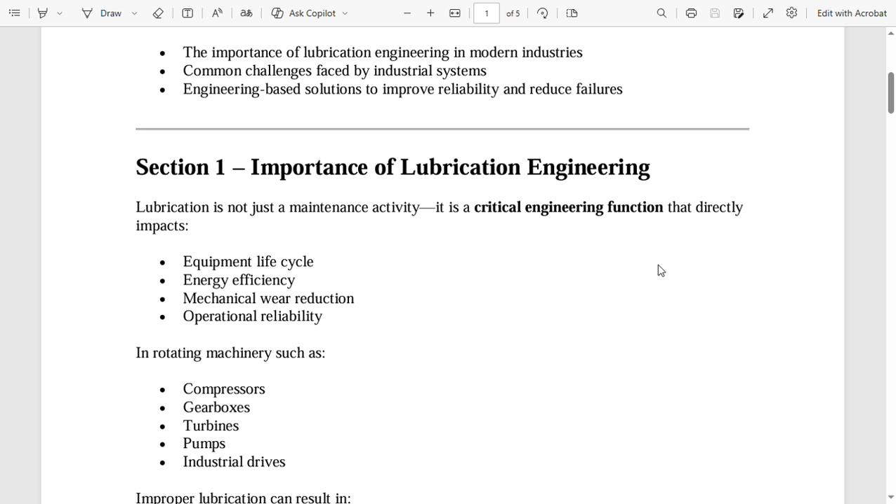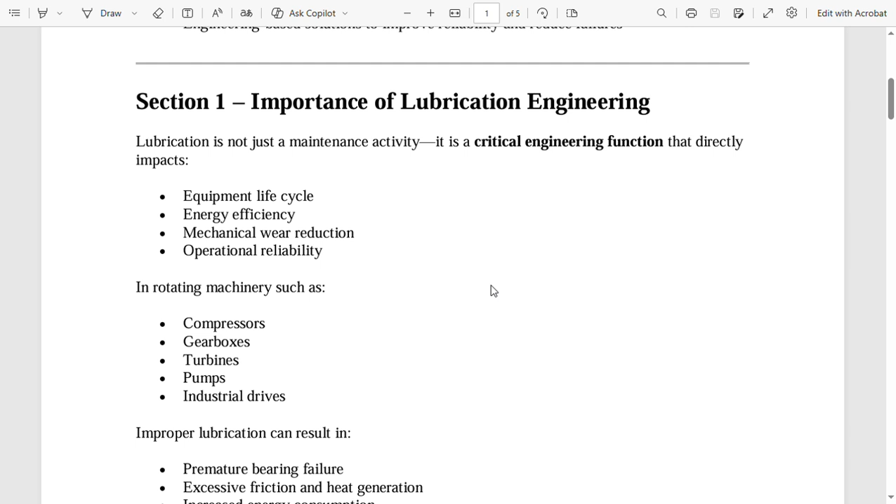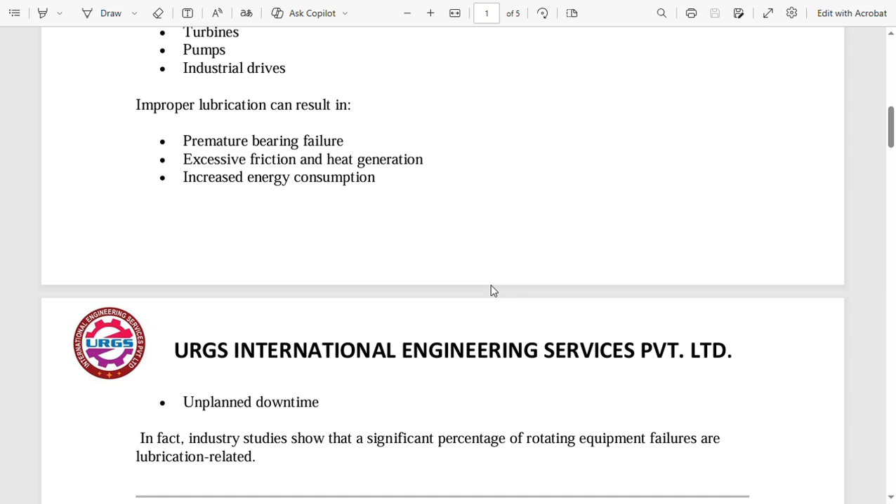Now, importance of lubrication engineering. Lubrication is not just a maintenance activity. It is a critical engineering function that directly impacts equipment lifecycle, energy efficiency, mechanical wear reduction, operational reliability. In rotating machinery such as compressors, gearboxes, turbines, pumps, industrial drives, improper lubrication can result in premature bearing failure, excessive friction and heat generation, increased energy consumption, unplanned downtime. In fact, industry studies show that a significant percentage of rotating equipment failures are lubrication-related.

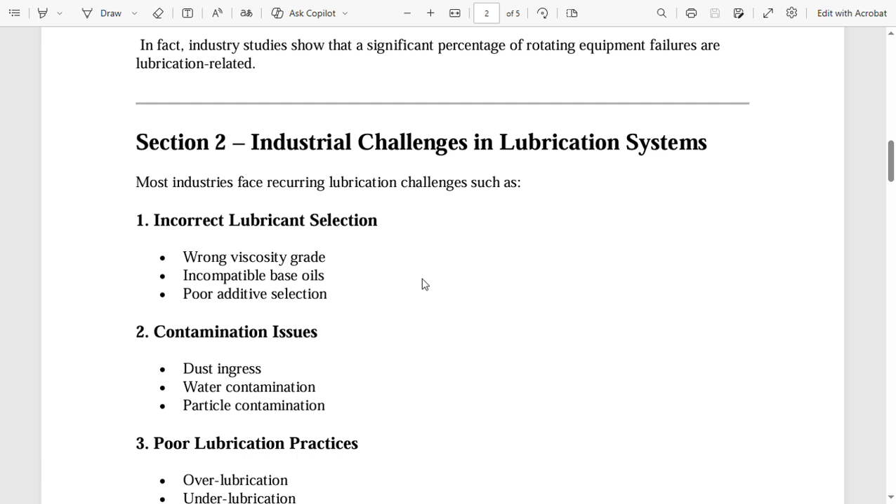Then next is industrial challenges in lubrication systems. Let us see this. Most industries face recurring lubrication challenges such as incorrect lubricant selection, wrong viscosity grade, incompatible base oils, poor additive selection, then contamination issues like dust ingress, water contamination, particle contamination.

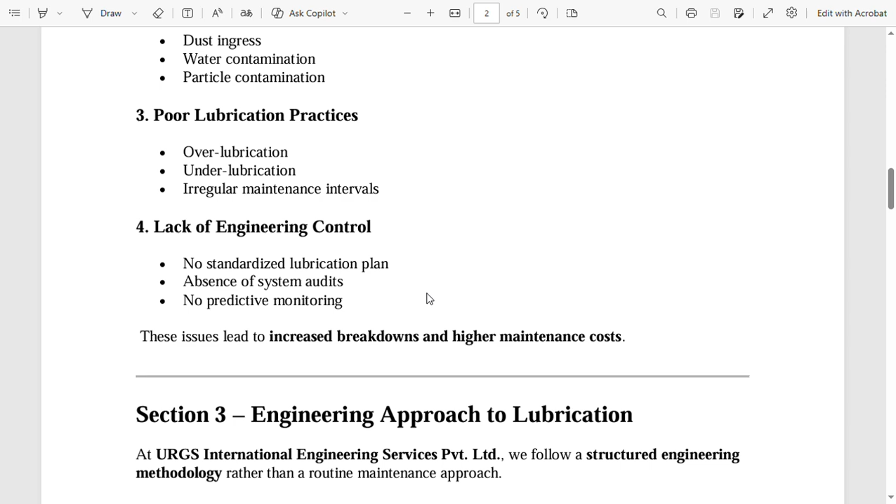Then next is poor lubrication practices: over lubrication, under lubrication, irregular maintenance intervals. Then lack of engineering controls: no standardized lubrication plan, absence of system audits, no predictive monitoring. These issues lead to increased breakdowns and higher maintenance costs.

Now engineering approach to lubrication. At URGS International Engineering Services Private Limited, we follow a structured engineering methodology rather than routine maintenance approach. Step 1, system assessment: equipment criticality analysis, lubrication point mapping, failure history review. Step 2, lubricant engineering study: viscosity optimization, compatibility analysis, OEM versus actual operating condition review.

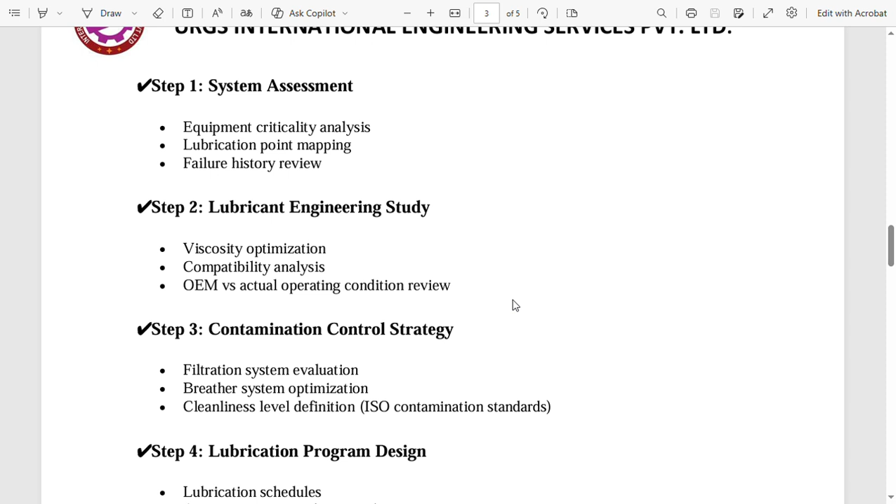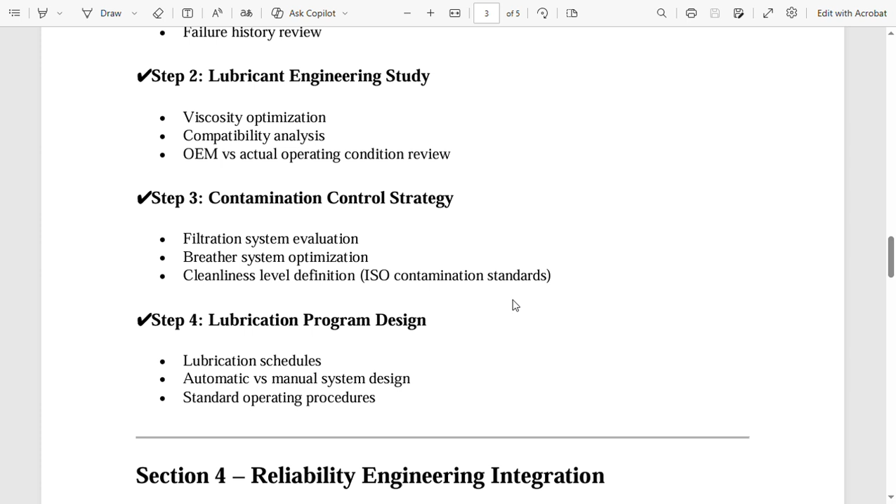Step 3, contamination control strategy: filtration system evaluation, breather system optimization, cleanliness level definition, ISO contamination standards. Step 4, lubrication program design: lubrication schedules, automatic versus manual system design, standard operating procedures.

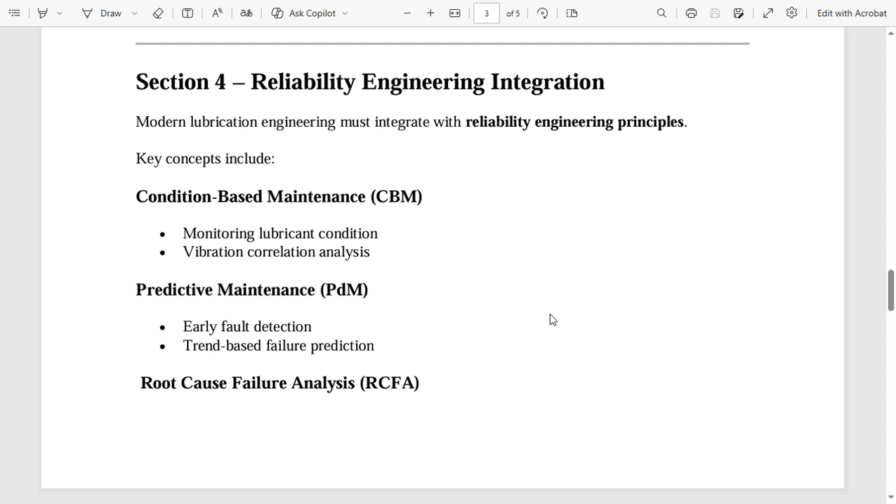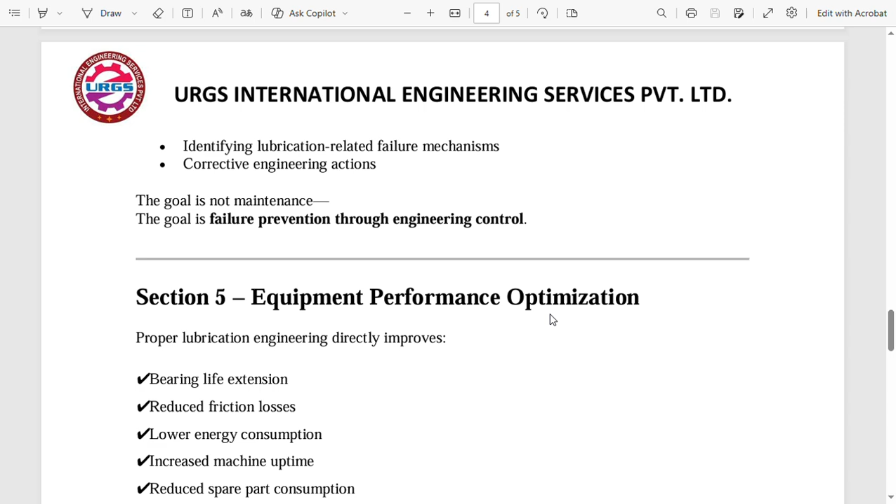Then next is reliability engineering integration. Modern lubrication engineering must integrate with reliability engineering principles. Key concepts include condition-based maintenance (CBM), monitoring lubricant condition, vibration correlation analysis, predictive maintenance (PDM), early fault detection, trend-based failure prediction, root cause failure analysis, identifying lubrication-related failure mechanisms, corrective engineering actions. The goal is not just maintenance. The goal is failure prevention through engineering control.

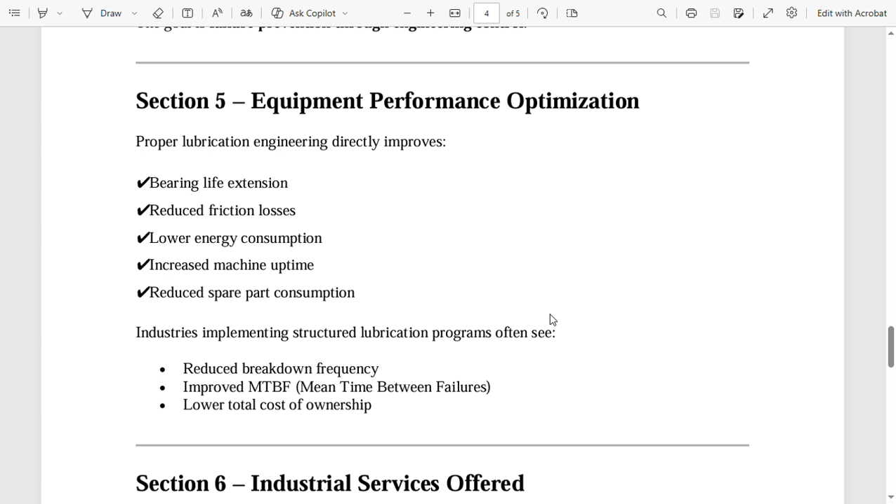Then next is equipment performance optimization. Proper lubrication engineering directly improves bearing life extension, reduced friction losses, lower energy consumption, increased machine uptime, reduced spare part consumption. Industries implementing structured lubrication programs often see reduced breakdown frequency, improved MTBF, mean time between failures, and lower total cost of ownership.

Then industrial services offered. URGS International Engineering Services Private Limited provides end-to-end technical consultancy, including lubrication system engineering design, industrial lubrication audits, failure analysis and RCA studies, reliability improvement programs, condition monitoring integration, training and technical awareness programs. Our approach is engineering driven, data-based and reliability focused.

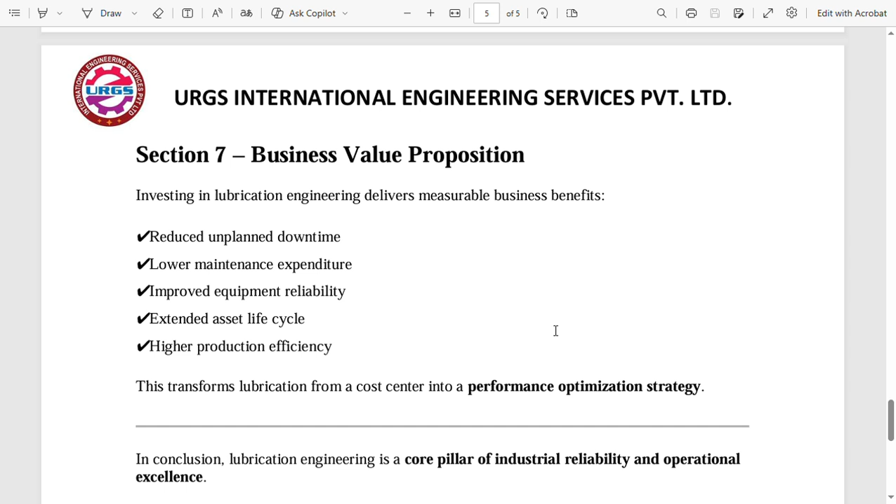Now business value proposition. Investing in lubrication engineering delivers measurable business benefits: reduced unplanned downtime, lower maintenance expenditure, improved equipment reliability, extended asset life cycle, higher production efficiency. This transforms lubrication from a cost center into a performance optimization strategy. So, in conclusion, lubrication engineering is a core pillar of industrial reliability and operational excellence.